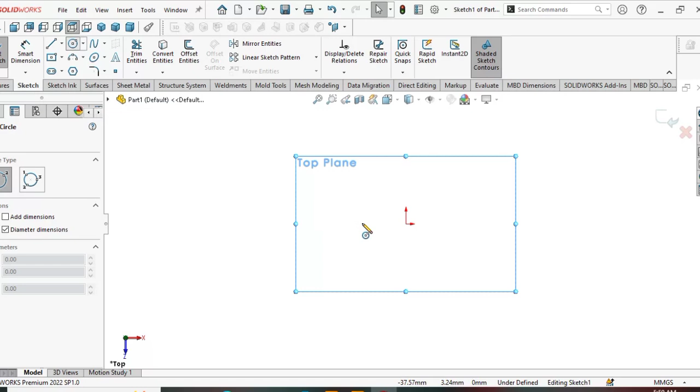Now I'm going to draw two circles and smart dimension them. Here should be 380, click OK. And this one should be 40.

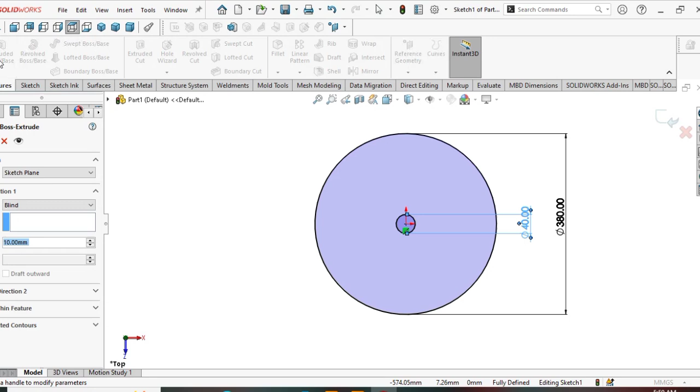Click OK. Go to features, select extruded boss or base. Here I'm going to highlight and type 3. Click OK. Now select this surface, sketch.

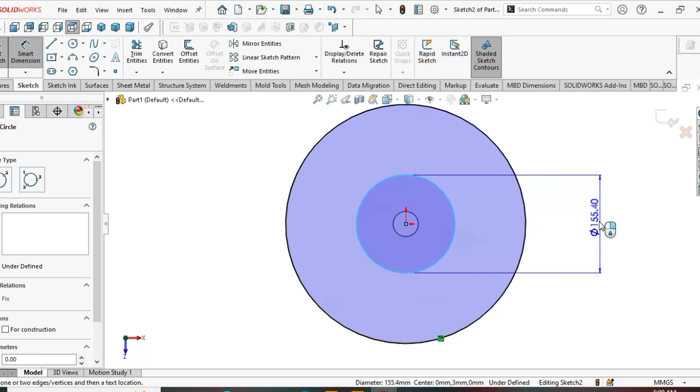Before that, I can convert entities. Now select a circle, go to smart dimension, and dimension it. Here it is 60 millimeter.

So I can go to features, select extruded boss or base. Before that, I come here to selected contours, then select this inside part. Here I'm going to highlight and type 50.

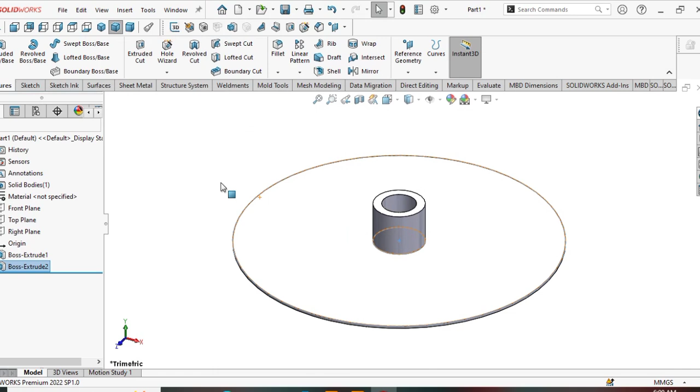Click OK. So I'm going to select the front plane, then sketch, and draw from this point up to this point, to this point, somehow.

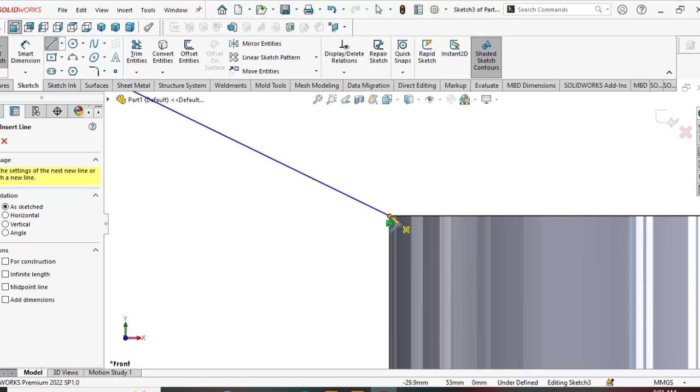You can press escape. You can select a line, draw now from this point to this point, to this point, to this point. So we are going to features, select extruded boss or base.

Now select the drop down menu and select midplane. Here we type 3. Click OK.

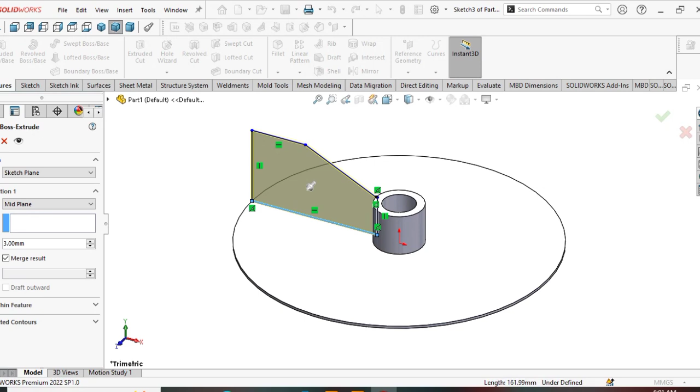Now we are going to circular pattern. You see here we have linear pattern, so under it you have a drop down menu. Click on that drop down menu.

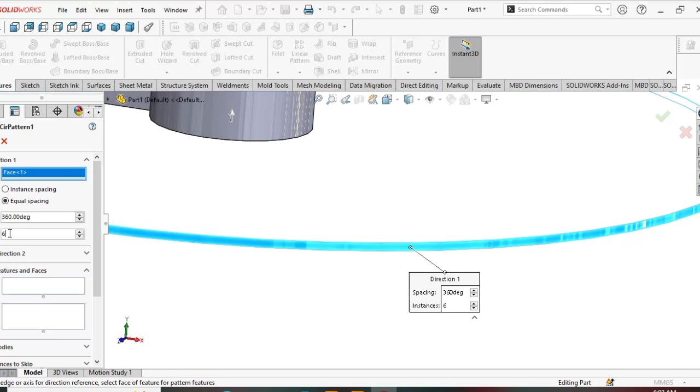You have circular pattern. Here on direction, come select this face here. See number of instances here, you can type 6. Go to features and faces, we select this blade. Click OK.

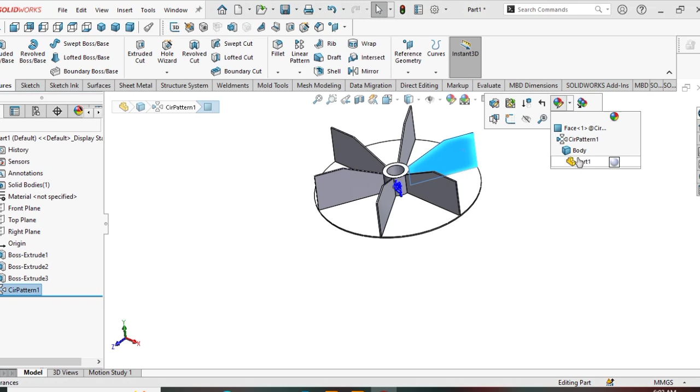Now I'm going to apply materials. You can click anywhere on this fan. Go to appearance, click drop down menu, select part. Go to appearance again, go to metal, you can select chrome and select this. Click OK.

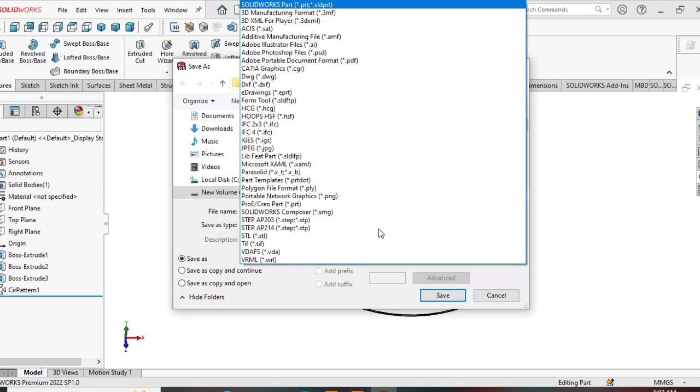Now we can go to save it. I'm going to save it as part 15, but you can name it as a fan or save as I do. So part 15, save. Thank you for watching.